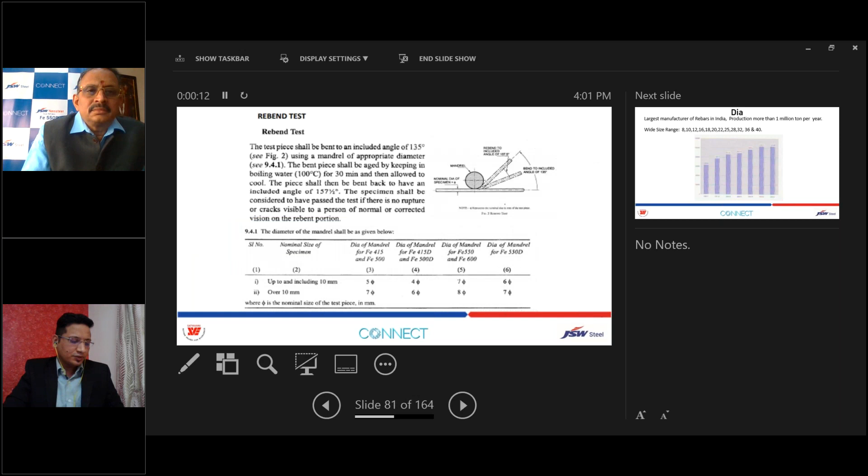Good afternoon, and thank you Omkar for the good words about my introduction. It's my privilege today to share some of the knowledge and thoughts about this very good topic that you have selected for the audience, particularly the engineers and practicing engineers.

It has been in my mind - there are many questions for me also regarding the use of higher grade rebars which we have been using and trying to find solutions for. So today I'm going to share whatever solutions we've found for the use of higher grade rebars, what issues we are facing, and how in the future this material is going to go higher and higher in grades. Welcome, all participants. I'm very happy to share this presentation today and I hope it will be useful for you all.

So higher grade rebar, the material of the future, is the topic of today's discussion. My presentation overview is: introduction briefly on the topic, and masonry, concrete, steel, and RCC - how it has transformed structural systems.

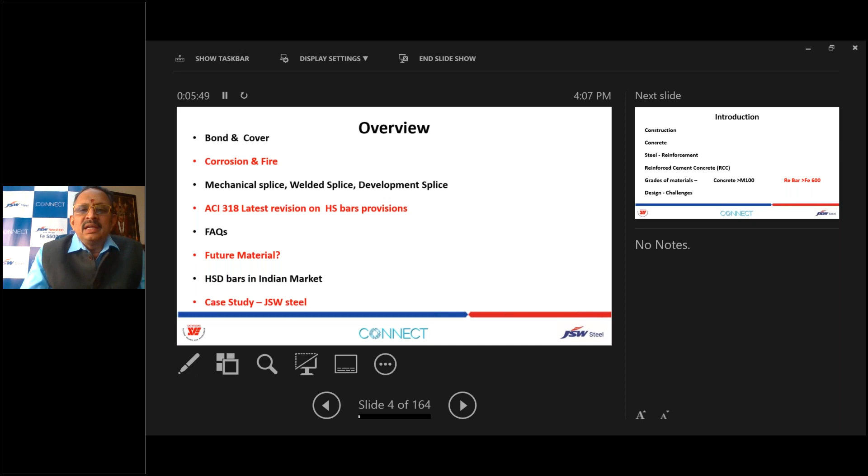So with this overview, let us get into the topic of the day, higher grade. We are all connected with construction, either in planning, design, detailing, engineering, construction, or maintenance, and we are all aware how important it is.

Full screen. One minute please, I was told you're not getting full screen now. Are you getting it now? Yes, we are getting it. Okay, thank you. Sorry for the inconvenience. Good that you told me in the beginning so the viewers and attendees are not inconvenienced.

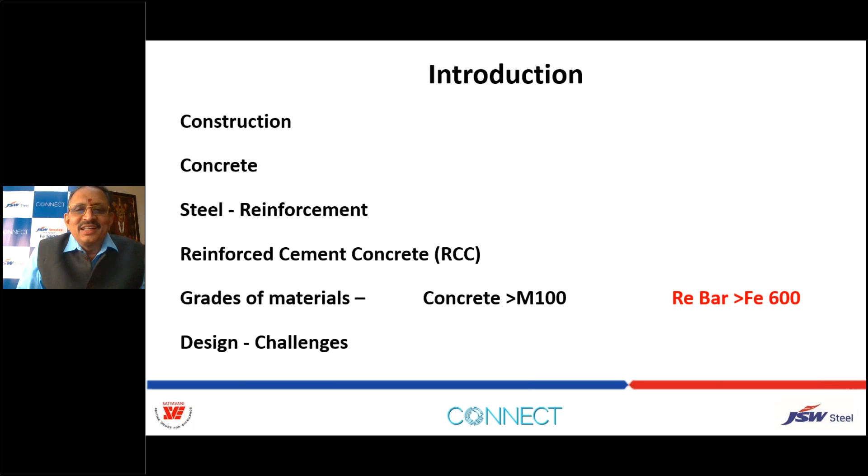So in construction, the role of reinforced concrete and steel reinforcement plays a very great role. In this pandemic and lockdown period, we are seeing a lot of lectures on concrete, since everybody thinks concrete is a complex material that we need to understand more about. I have given many lectures on concrete, precast and all, and on steel for pre-engineered buildings, but reinforcement as a material as a specialized talk, this is the first time I'm talking about it. To my surprise, I found there is a lot to cover, so please stay alert and aligned with me to get this information I'll be sharing today.

Reinforced cement concrete is the most versatile material for structural elements, spread uniformly worldwide with the widest applications. As we all know, concrete itself is the second most used material after water, and concrete cannot go alone - it needs reinforcement.

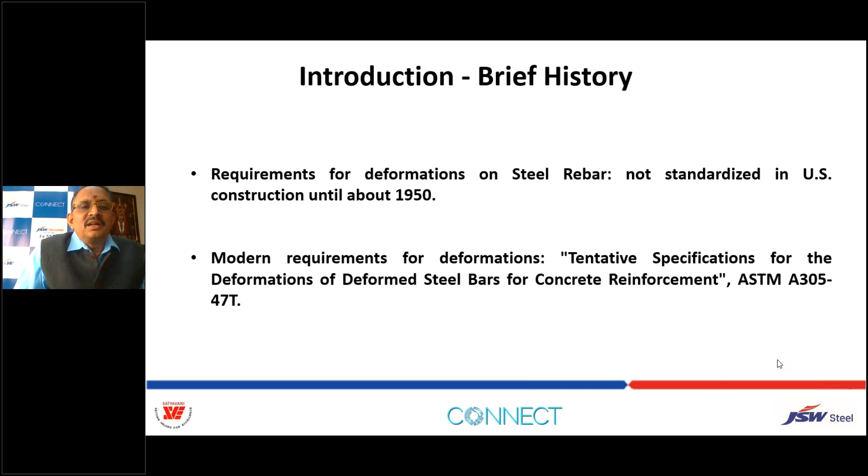So the requirement of deformations on steel rebar - reinforcement bars in masonry construction was first used about 600 years back.

So we can all feel confident that the concept of reinforcement per se is time tested. During the 18th century, rebar was used to form the carcass of the Leaning Tower of Nevyansk in Russia. The cast iron used for the rebar was of high quality, and there is no corrosion on the bars till date - that means more than 200 years.

Europe and North America developed proper reinforced concrete in the 1850s, and we know the longest standing reinforced cement concrete high-rise building is about 113 years old now. So around mid-19th century, rebars were used in producing modern reinforced concrete.

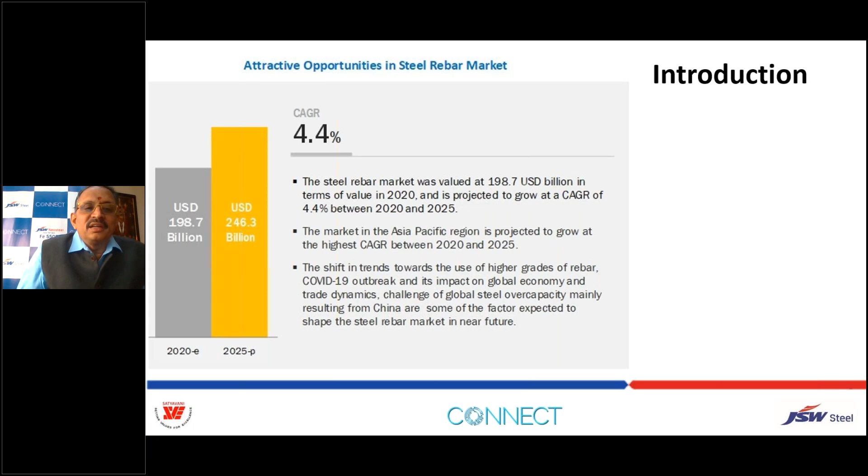Now we can see the business of reinforcement is about $250 billion, and it's going to reach that by 2025. Currently it is about $200 billion. Out of this 246 billion, the Asia Pacific consumes the maximum reinforcement, doing the maximum business. We are all in the Asian region and Indian subcontinent, one of the fastest growing countries.

It is very important for all of us to be clear about these grades of this material, the quality of this material, and using this material.

As we all know, structures all started with masonry, which we see in structures about 2,000 to 5,000 years old. Then came concrete, then reinforced masonry, and then steel structures. Today reinforced concrete has become very common, being used everywhere in rural, urban, developed areas and underdeveloped countries also.

And next is the pre-stress, which has gone beyond reinforcement and composite materials. Now today we are talking about high-grade materials, upgrading this reinforced cement concrete. Otherwise, we were only used to using M15 grade concrete and Fe415 for almost 2-3 decades. Now is the time we have to upgrade our materials, and also upgrade our design data with these higher grade materials. So let us just refresh our thoughts on this reinforcing material.

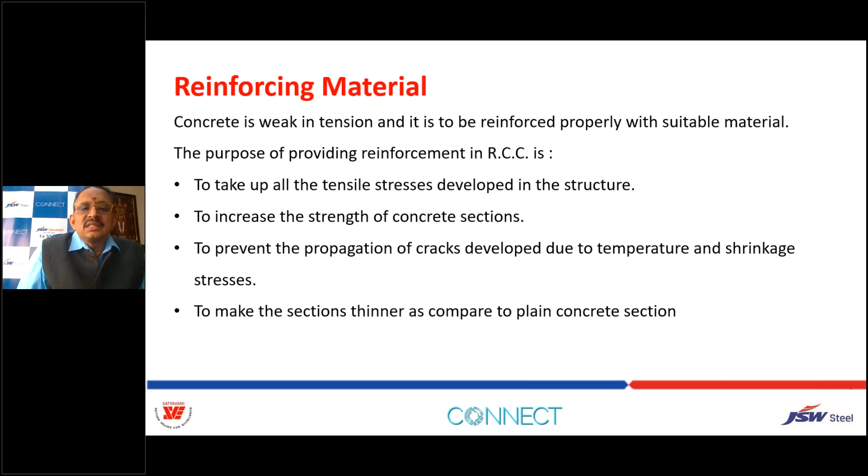As we all know, concrete is weak in tension and is to be reinforced properly with suitable material. The purpose of providing reinforcement is to take up all the tensile stresses and increase the strength of concrete sections, and prevent the propagation of cracks developed due to temperature and shrinkage. So we provide reinforcement not only for tensile stress, but also to restrict crack propagation due to temperature and shrinkage stresses, and to make sections thinner as compared to plain concrete sections. So these are all the reasons for reinforcing, and the criteria is it should be having perfect bond with the concrete.

That is the most important thing, as we all know. The steel reinforcement should develop the bond. Otherwise, because these two are different materials, we can't utilize the tensile capacity of the steel without this bond capacity. So that is one of the most important criteria.

And next is it should be of high tensile strength, because we are trying to compensate the weakness of concrete in tension. And cost should be reasonable, because many people ask me, students particularly, why not aluminum, why not other metals which also have higher tensile capacity, even carbon fiber. So reasonable cost is the basis - steel is an optimum material satisfying all these requirements.

The next most important point is coefficient of thermal expansion, which is reasonably in tune with that of concrete, because when there is temperature change, if these two materials have different coefficients, then it loses its marriage or bond connection. So it should be workable.

Next most important thing, we should be able to cut it, bend it, and join it, because we should be able to fabricate. Concrete has become so popular only because of its flexibility. Same way rebar with steel also has become popular only because of its ease in cutting, bending, and joining. We are trying to further improve this as we move forward. We'll discuss all those points.

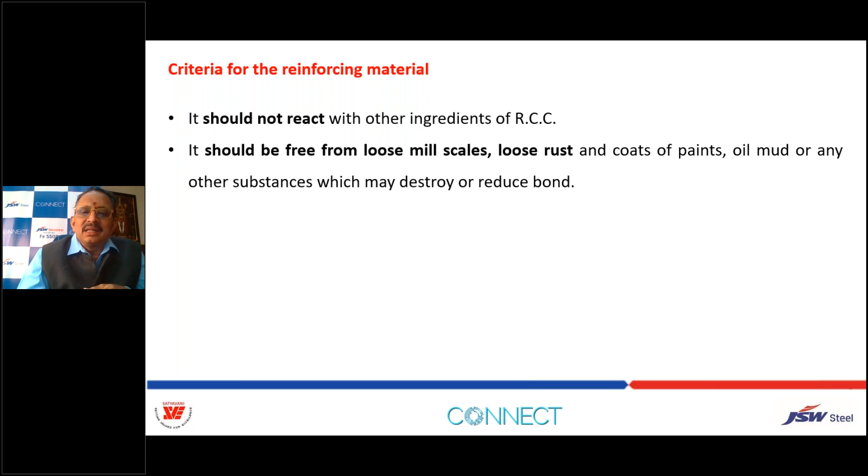So that's how we have got this steel reinforcement or rebar - tor steel or TMT and HSD bars now today. Tor Kari was a brand which I used in 1990, which had come up with 550 grade even those days. I can't forget it, because I want to share that experience with you. Many people - at the time I completed my design and drawing with Fe 415, then my client came up with this Tor Kari, saying that it is having very high strength, almost 30% more strength compared to what I had already designed.

So please modify the drawing. It was such a huge work, and you know, structural engineers are paid very paltry fee. And I thought that I must do it efficiently. So what I did is I applied a 1.3 factor and reduced the steel reinforcement. In the process, I ignored certain detailing criteria and minimum percentage of steel criteria and issued the drawing.

And also almost construction had started. So what I'm trying to say is, please don't use such methods. We have to inform the client - when you are saving the cost, you should compensate us for the extra work also. So use of higher grade materials, if we have to do, convert the drawings, convert the designs, we have to spend again right from the scratch.

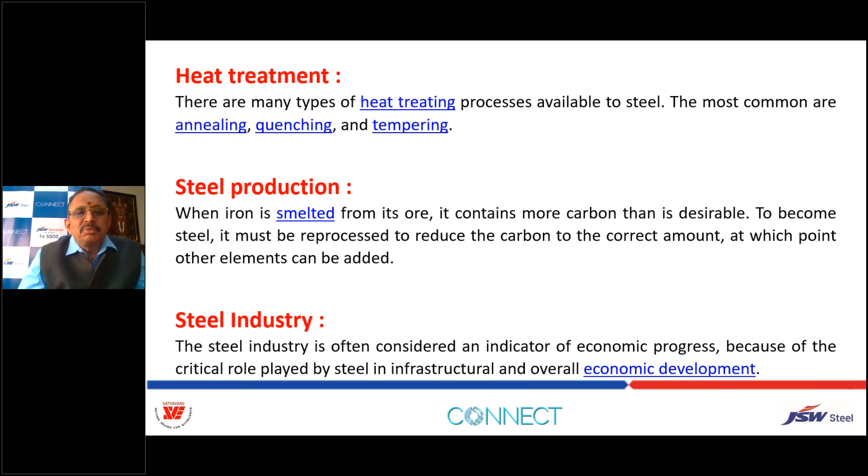So regarding the suitability of steel as reinforcement: steel is very strong in compression, of course with buckling and proper ties, and also has tension capacity. We utilize almost 87% of its strength as per our design, along with shear and torsion capacity.

Concrete develops a very good bond with steel, and steel is ductile. That's very important because it never fails suddenly. Steel gives us time to understand the yielding, and we can save lives if it reaches that point. More elongation of steel before failure helps us.

That's why we insist on the percentage elongation of steel. The steel bars can be cut, lifted, and welded easily with commonly available tools and sand machines. It also has a longer life, if provided corrosion protection, or if we use corrosion-resistant steel.

It's easily available because, over the last 20 years, steel production in India has grown threefold with companies like Jindal, Tata, and others, which was otherwise mainly produced by the public sector. India has grown from 30 million tons of production capacity in the new millennium, around 2000, to 90 million tons.

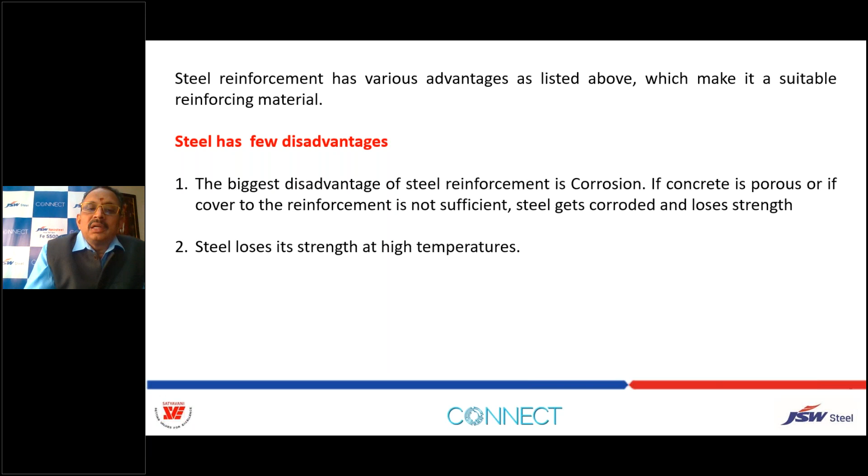Regarding rebar types, we have come across mild steel. The property of 7850 kg per cubic meter is what we typically take for density, but it can range between 7750 to 8050, or 8.05 ton per cubic meter unit weight. This is the main property.

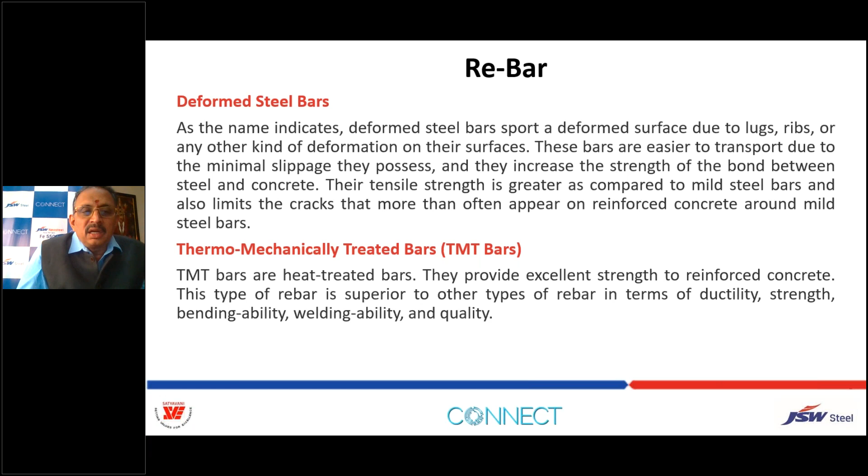We also have deformed steel bars, TMT bars, which are very popular today - thermomechanically treated bars. We also have high strength deformed bars; that's the actual technical term as per the code, and these are the high strength deformed bars that we are using.

The HSD bars have got very good corrosion resistance, as well as high strength and ductility. We'll examine all these properties.

We also use rebars with corrosion protection, such as carbon steel rebar, European rebar, or galvanized rebar, which has a protective coating against corrosion, as well as epoxy coated rebars and stainless steel rebars that are coming up. And finally, the glass fiber reinforced polymer rebars. So these are all the types of rebars.

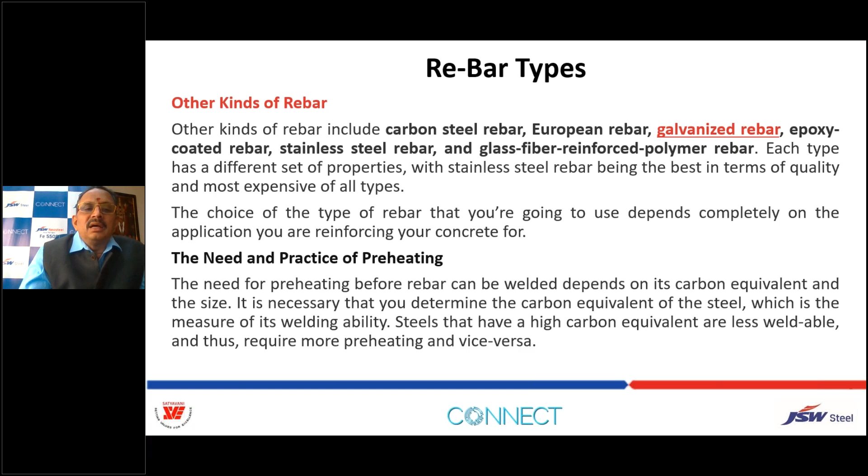Just for academic interest, I'm sharing this, not directly relevant to today, but since we are talking about corrosion, we need to think about this. We also need to discuss the practice of preheating, which is required for weldability, and I'll share more on that as we move forward.

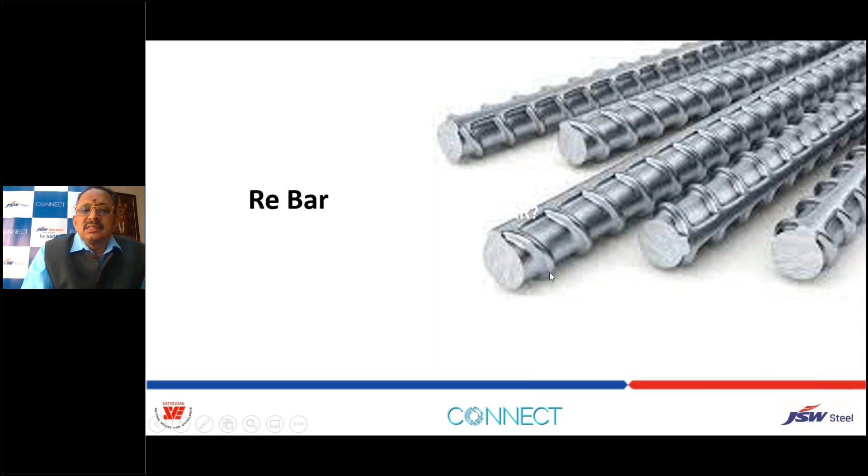Now the types of steel bars. As we all know, HYSD bars used to be twisted with ribs like this, and now we have TMT and Thermex reinforcement bars, which look like this. This is the rebar we normally use. There is a specification for the radius of this junction and the rib size for a proper, adequate bond, which we'll be discussing. So these are all the rebar types.

We don't use rebar in isolation, we all know. There will always be a joint for the rebar, or we use it as a mesh, or we use it in a bent condition.

So what are the issues? Why should we talk about higher grade at all? What are the issues in the current rebar we are using, whether it's FE 415 or FE 500? Let us just refresh again.

As per SP 34, we do the detailing - how to place the reinforcement, what is the spacing, what is the diameter, what is the minimum and maximum spacing, and what is the minimum and maximum steel percentage. All these provisions are covered in IS 456, along with detailing requirements like development length, position of the splice, and bent bars, all defined in SP 34. I'm not going into detail, just refreshing on these ideas.

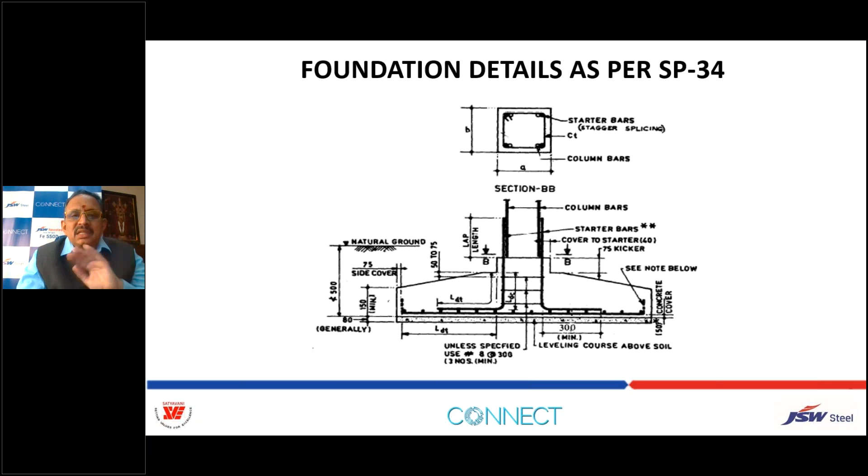Then we have ductile detailing as per IS 13920 for earthquake resistance, and we use mechanical couplers also in the higher diameter bars. Sometimes we are forced to go for welding, and there are precautions we have to take for that.

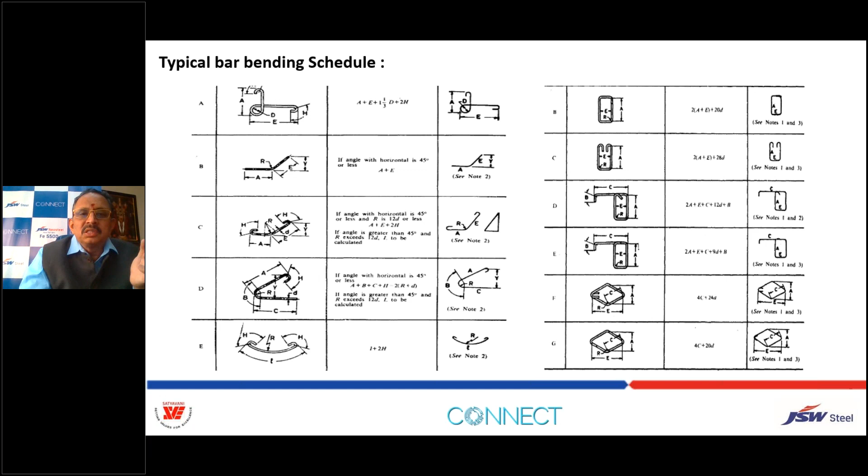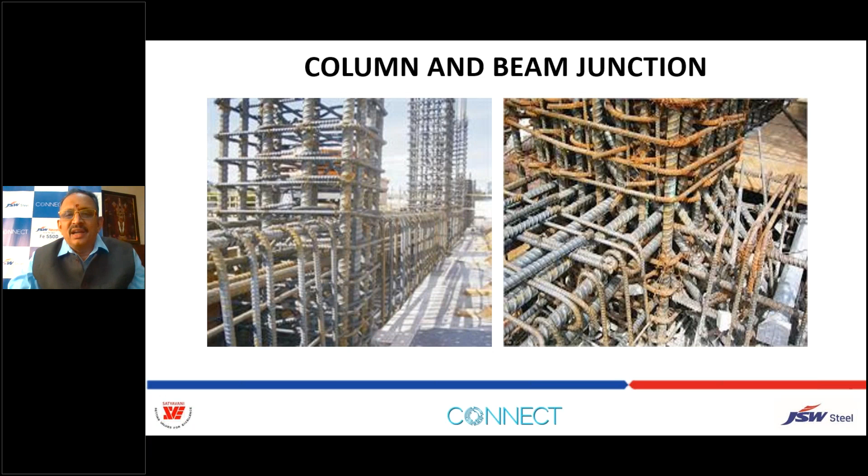So how do you solve this? The only solution is higher grade material. These are project pictures showing reinforcement congestion - here too you can see how steel makes it hard for concrete to go down. You might use flow mix and 12mm aggregate only, but it's still a challenge to concrete and vibrate or compact in this kind of situation.

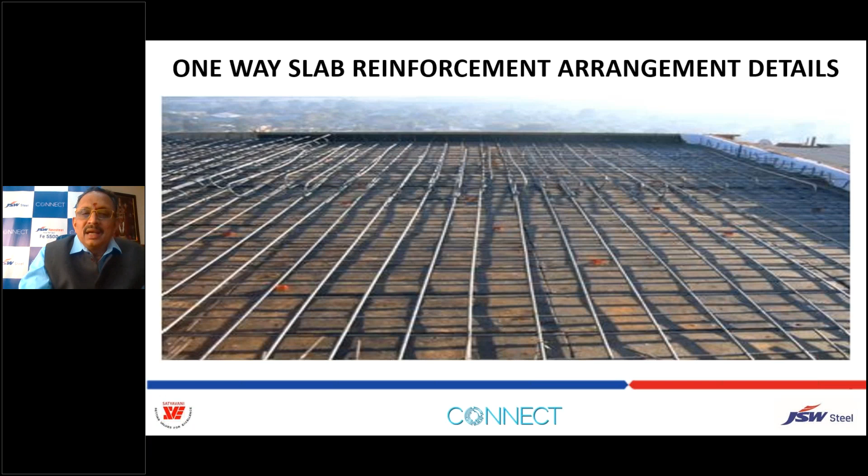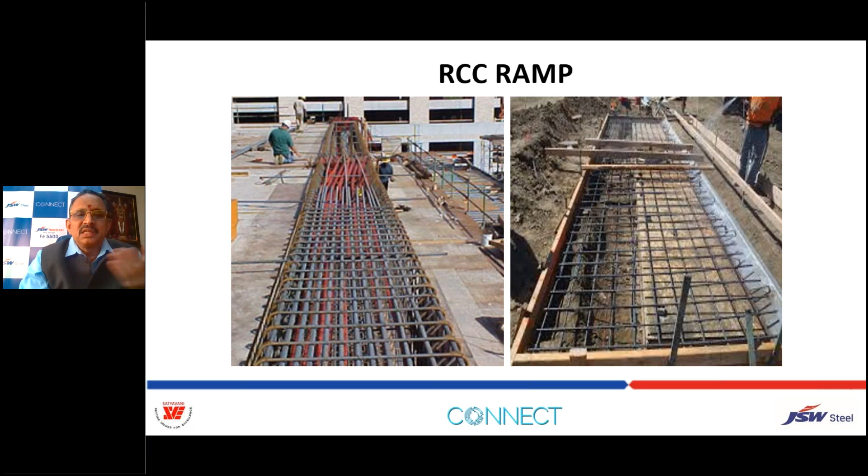And types of rebars, we all know mild steel almost is gone out of usage, except in structural steel we use it for tie bars and all that. But otherwise, HYSD, now it is 2008 IS 1786, and deformed bars have become the order of the day. We are using high strength deformed bars. Now we have this FE 500, and now it's going to FE 550 also. And TMT bars and corrosion resistant CRS steel.

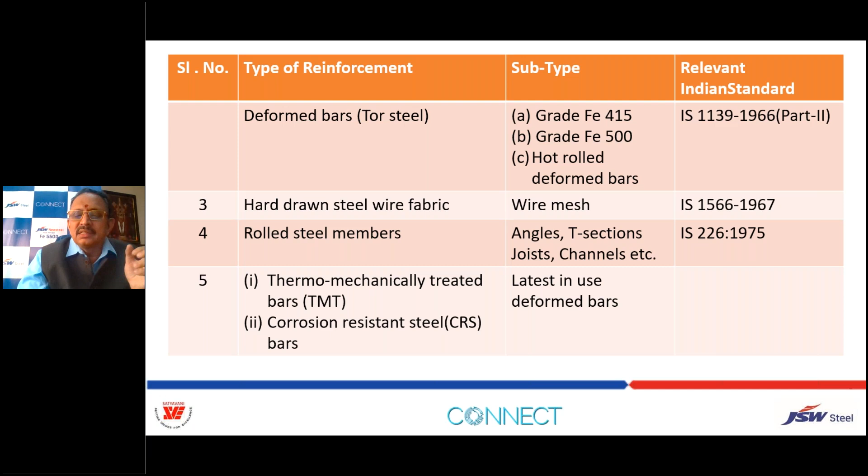That is low carbon, and this kind of material has become very common. Mild steel reinforcement - I won't go into detail - Fe 250, which we used to use for stirrups 30 years back. Almost from the last 20 years, we stopped using this mild steel. But mild steel is good for bending, and probably we can use it where spacing governs. I clarified in FAQs whether we can use a combination of HYSD and mild steel - no, you cannot use two different grades of steel as per the code within the same main reinforcement. So that we have to keep in mind while designing.

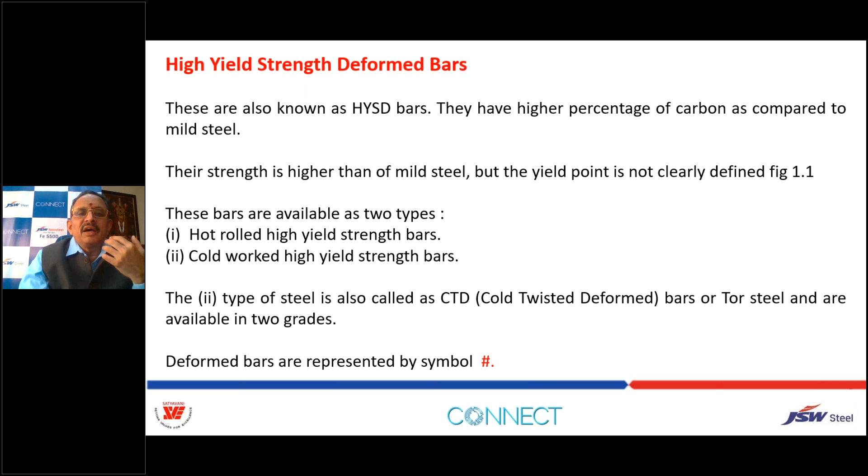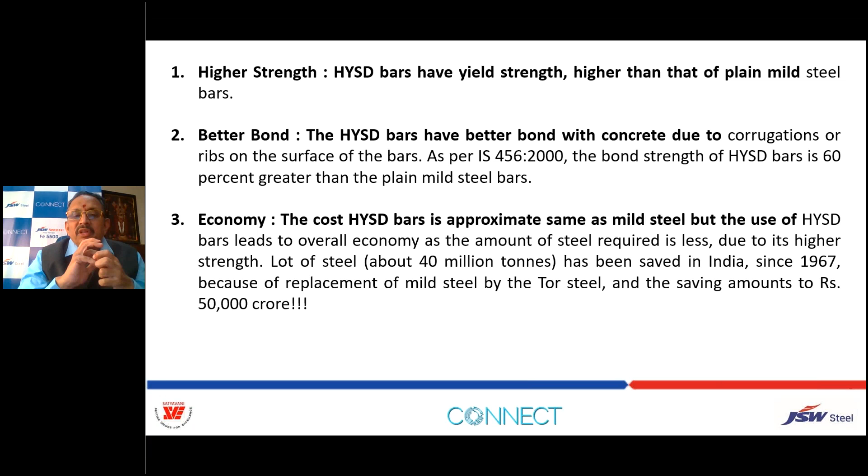HYSD bars itself had a lot of advantage over mild steel, because in mild steel we had the major problems of bond, the development length. So with the HYSD bars, with the rib on the surface, we could improve the bond capacity by almost 60%. And now TMT bars have further improved, because in HYSD we had the problem of surface cracks and all. So now with this TMT method, we are able to get much better quality with high yield strength, better weldability, and ductility - that's most important - and superior corrosion resistance.

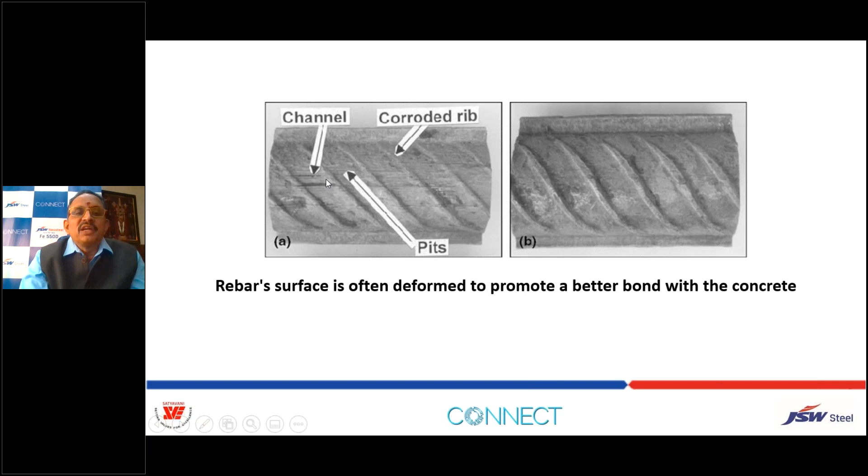So these are all the important things. We can see the rebar surface deformed to allow corrosion limited to the rib, and the channels are there, and these ribs also will help us for bond resistance. And these pits for corrosion - we have to be very careful about measuring the corrosion resistance, and it will give better bond. These deformed bars have these ASTM standards.

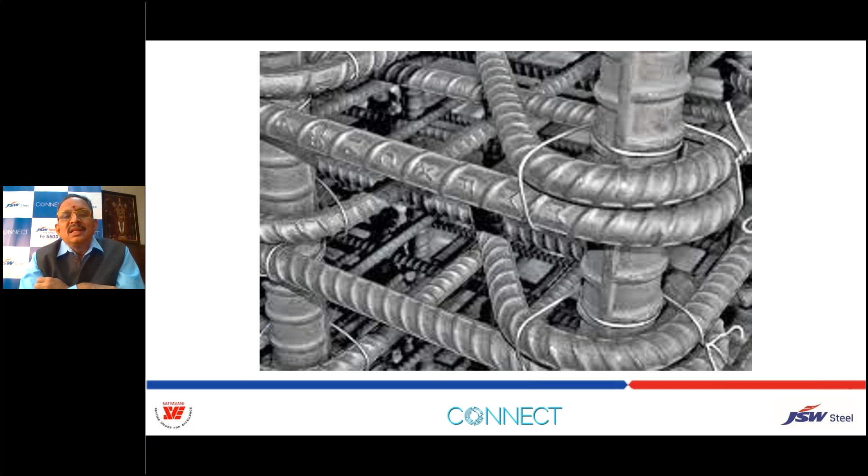The latest is ASTM A706 and 615. So higher grade reinforcement we can use. And the physical characteristics of these rebars - we must check for thermal expansion coefficient for concrete and steel, which has to be the same. And bendability - this is a very important aspect, because the anchorage we can get only with the bendability.

So rebar has ribs that bind it mechanically to the concrete. The ribs develop this mechanical bond resistance - it's not only by the chemical bond stress, and it can still be pulled out of concrete under high stresses. So to prevent such failure, there should be embedded enough concrete and anchorage provided to the reinforcement. Common rebar is made of unfinished tempered steel, making it susceptible to rusting.

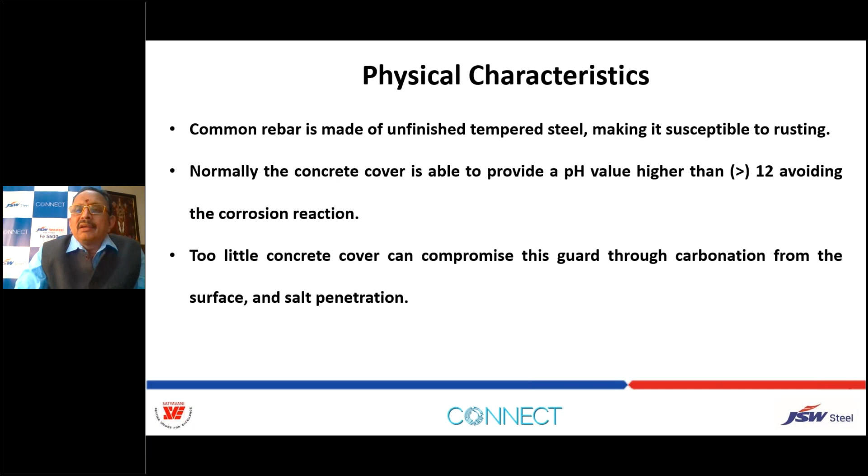That's why concrete cover with a pH value normally 11, and it can be greater than 12 also, avoids the corrosion reaction. So too little concrete cover can compromise this guard through carbonation. Adequate cover as per IS 456 provisions for durability criteria has to be maintained. Too much concrete cover is also bad, because crack widths will increase with cover beyond 50mm, so we have to strictly follow the provisions of IS 456, the durability criteria.

It's not just enough to design with adequate cover and leave it. We should also check the performance of this concrete with tests on carbonation and sulfate resistance. So that is all to protect the steel reinforcement.

So this is the brand embossing. We should check the brand of the steel with the brand embossing, as per the code. And corrosion resistance bars have 0.18% carbon content as compared to 0.2% of HYSD.

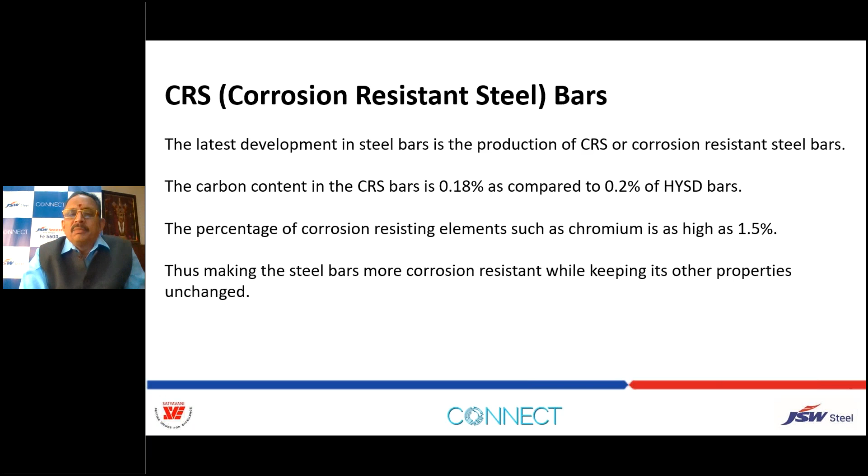And elements chromium should also be 1.5%. This is the CRS steel. And then we have this proof stress of 0.2%, and yield stress at 0.2% of proof stress.

Characteristic strength, we all know concrete characteristic strength. Likewise, we should have the steel characteristic strength also. The tests as per the code we have to conduct for maintaining the quality. Normally I have not come across major problems in steel characteristic strength unless it is a very bad manufacturer. All reputed manufacturers give us good strength. In my experience, I haven't come across bad steel so far. Only the brand we have to ensure.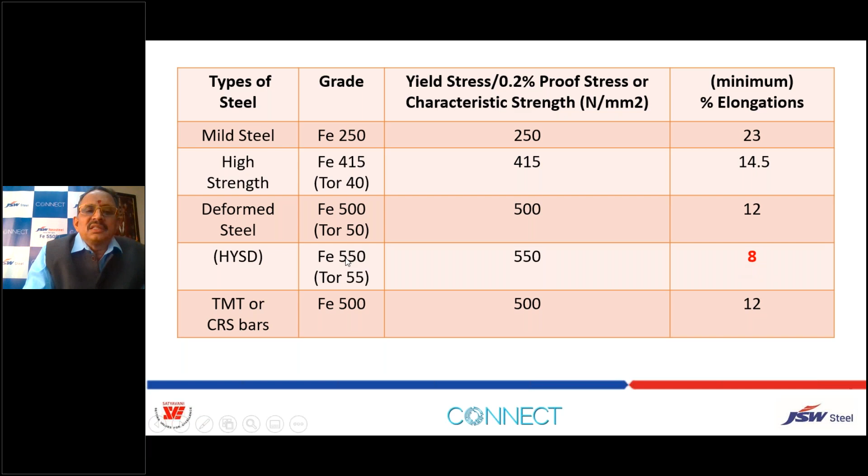And then we have this comparison of various reinforcement. The only thing is this HYSD bars of 550, as per code, the elongation will be allowed. But if you are designing for earthquake zones, seismic zone 2 or 3, we must insist on a minimum 14 percentage elongation. That's why you come across 550D and all that in the market.

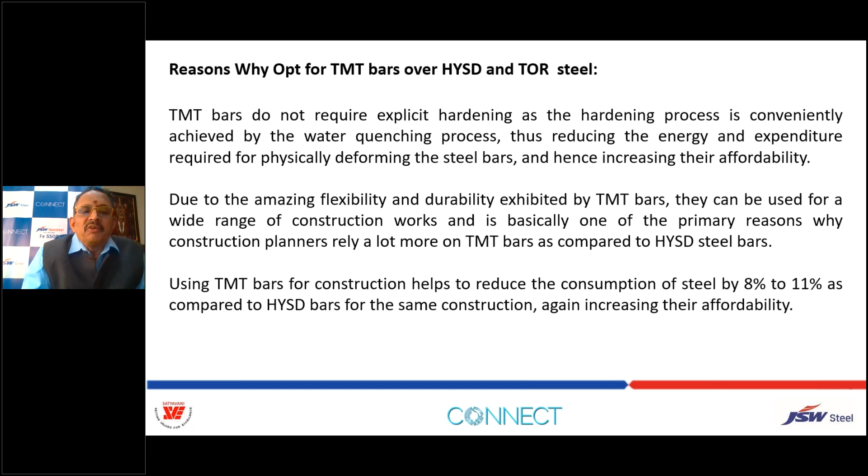This TMT bars over HYSD bars, I'm just comparing. We have surface defects in HYSD, which are eliminated by using TMT bars. A lot of flexibility and durability is found in TMT as compared to HYSD. And reduced consumption of steel, reduced by 8 to 10, 11%, because of its higher strength. TMT means I'm talking about 500, FE 500, as against 415 which was there. And now with HYSD bars, we are talking about 550 and 550D.

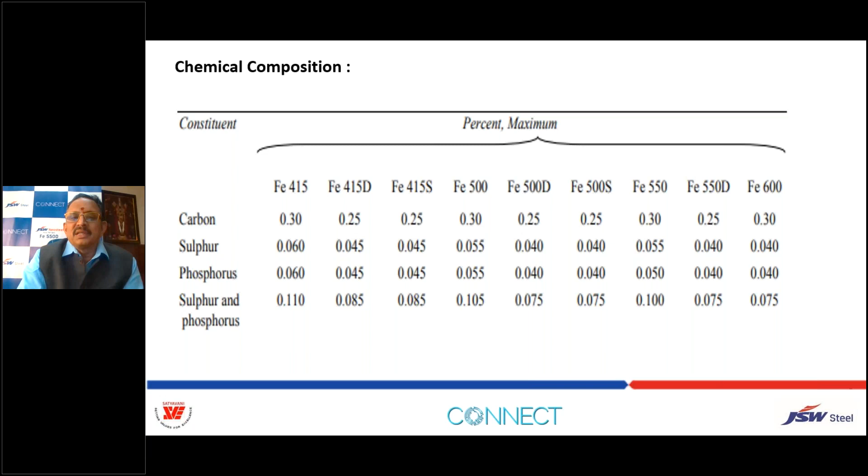So this is the chemical composition. We are all aware if it is just 550, it is 0.3 carbon content. And if it is 550D, carbon content is reduced to improve the ductility. The sulfur and phosphorus are also reduced to increase fire resistance and overall ductility. These are all the guidance as per the IS provisions.

Now let us talk about high strength deformed bars, ranging beyond 500. Now we are talking about 550. In India we also have the possibility of procuring 600 or 650, customized. So we can procure this kind of high strength if the particular project requires it.

And there are provisions, as I said, in ACI. So the provisions required for high strength rebars in the codal provisions, amendments are required for IS 456. As I said, it requires improvements in the bond and bendability of these high strength bars. We must check the bond capacity and the bendability. Cover provisions - do we require any modification in the cover? And what about the corrosion of these high strength bars?

Because when we utilize such high strength, the diameter to be maintained as per the design is very important, and with corrosion, we all know the effective diameter is going to reduce. Ductility provisions are also important - even if we use high strength bars, ductility is very important for seismic resistance, percentage elongation, and fire resistance. The splice, the development length, the regular bond splice or mechanical splice with mechanical couplers and welding.

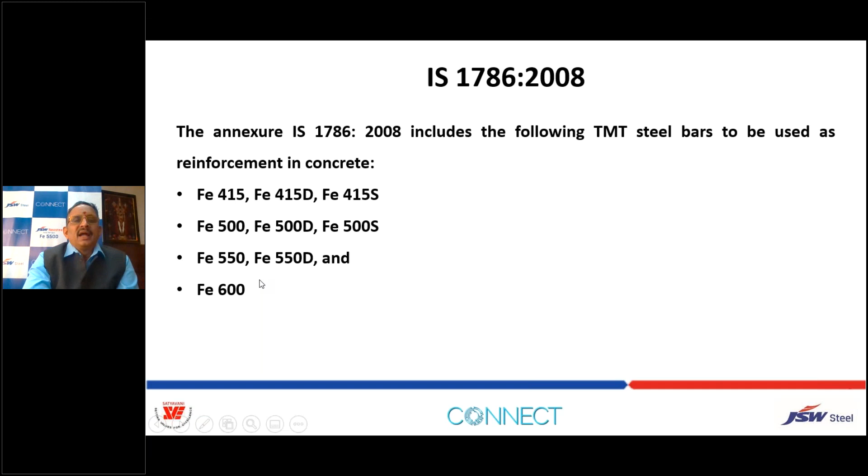And we have to do crack width calculations when using this higher grade reinforcement because of the higher stresses. Though we are increasing the strength of the steel, the concrete we might be using M25 or M20, or highest M40, M50 also. So it's always good to check the crack width as per our tensile stress in the rebars.

And design aids - I have come across, in fact, when I asked my team what is the disadvantage of using 550, they said we don't have this modification factor for the deflection check in IS 456. So I always say please don't use this modification factor based on L/D ratio alone. Calculate the elastic deflection and the long-term deflection, and then use that percentage for the modification factor, and try to give adequate provision for this modification factor instead of just bothering about it directly.

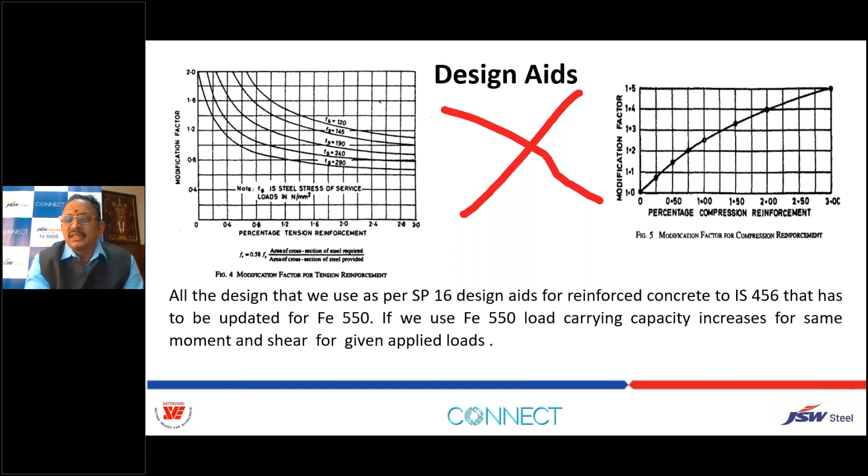And then stress strain curve for these high yield strength bars and HYSD bars, IS 456 has given up to 500. The modification factor will have an effect on the stresses as well as the deflection criteria. So we all have to take care while using the high strength bars.

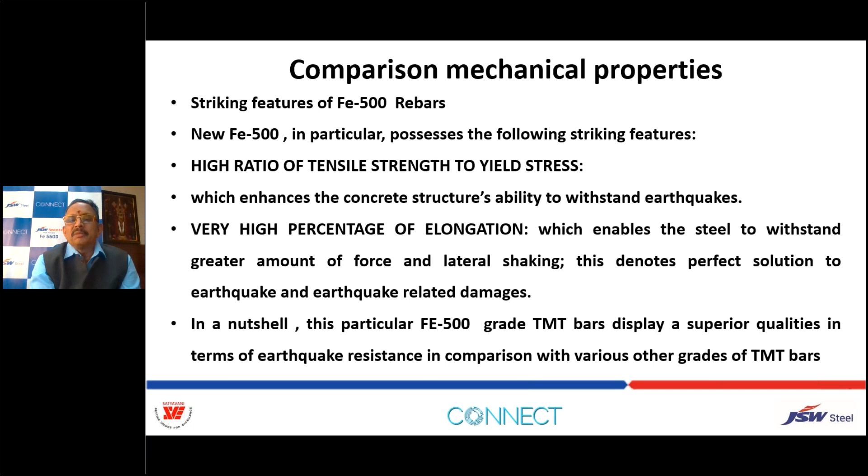And regarding mechanical properties, there is a high ratio of tensile strength to yield stress and very high percentage of elongation that is required for ductility, and TMT bars display superior quality for all these requirements.

And bend test, we have to do the bend test because once we give the drawings and approve the grade of steel, it should not so happen it starts cracking while doing the bending for the fabrication. So it's very important to do the sampling, bending and rebend test as per the codal provisions. We have to do all these bends and verify the performance of these bars.

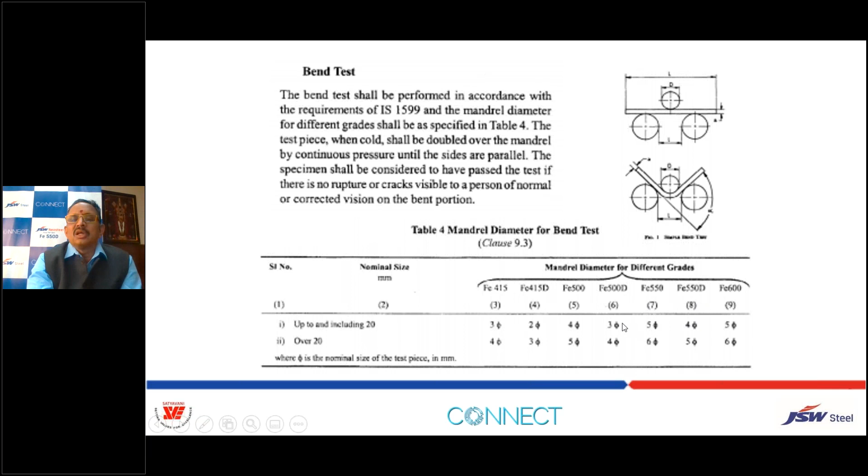These are all the sample bend tests. Including 20 dia bars, we have this bend 4 dia for 550D and 5 dia for 600, and 5 dia for 550. So for ductility, we must insist on 4 dia and 3 dia for 500D.

And a rebend test - in fact, at the site we fabricate the reinforcement, assemble it, and at the site we require some change and we do the rebending. So there is a gap between the bending and rebending. In the test also, it is recommended to give the time lapse between the bend and rebend when we are testing, so that it represents the realistic site condition. And if you are satisfied with the quality of the reinforcement rebar, we can use it.

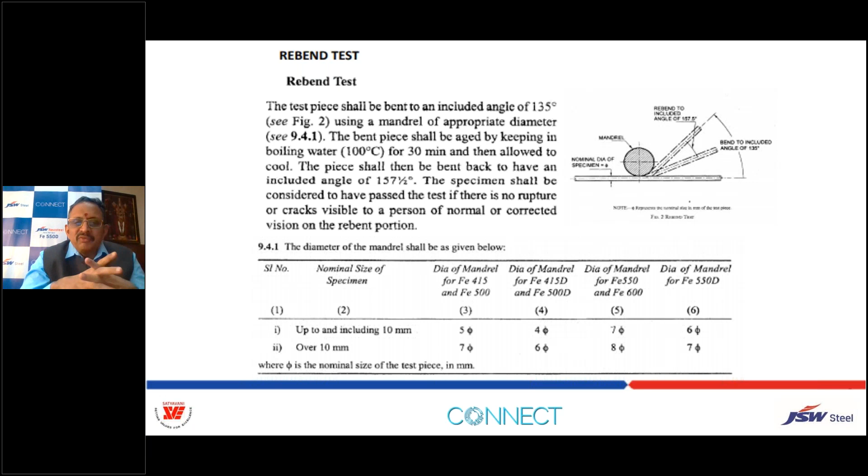Ductility is important in the TMT process itself, and low sulfur and phosphorus content improves the ductility also and fire resistance also. And bend radii must not be below the prescribed minimum sizes.

So this is a very important point for bending of the rebar. That means when we detail, we should take care of this. And incorrect bending can severely affect the performance of steel.

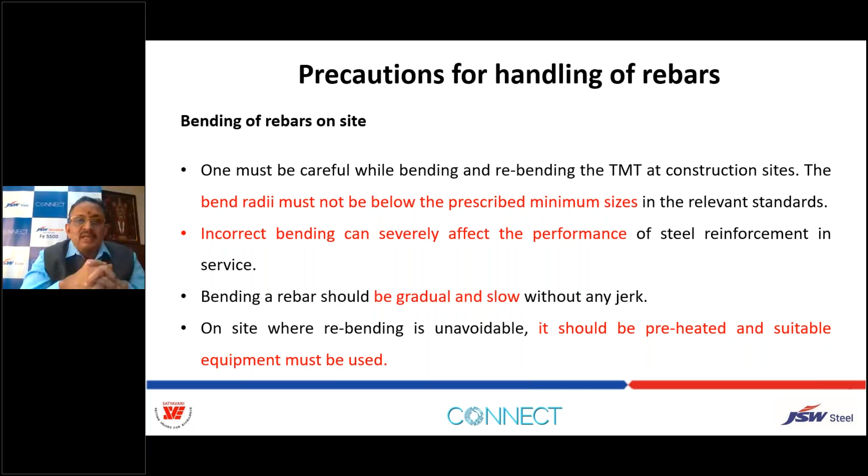And it should be gradual and slow - that means while bending, there is a rate of bending. So we must train the bar benders to follow that gradual bend, because otherwise the steel material will be wasted - they'll break and they will complain about the quality of the steel. It should be preheated wherever required, and suitable equipment should be used for this bending.

And next is the most important point - we have to differentiate between rusting, corrosion, and pitting. These three are different characters. We must understand rusting means it is like atmospheric.

But corrosion goes deep into this, and pitting - sometimes the depth of the pitting is more than the diameter of the bar. It's very important we must observe this pitting corrosion, which occurs randomly and localized on the metal surface, so the depth of penetration is much greater. We have to be very careful about this pitting corrosion.

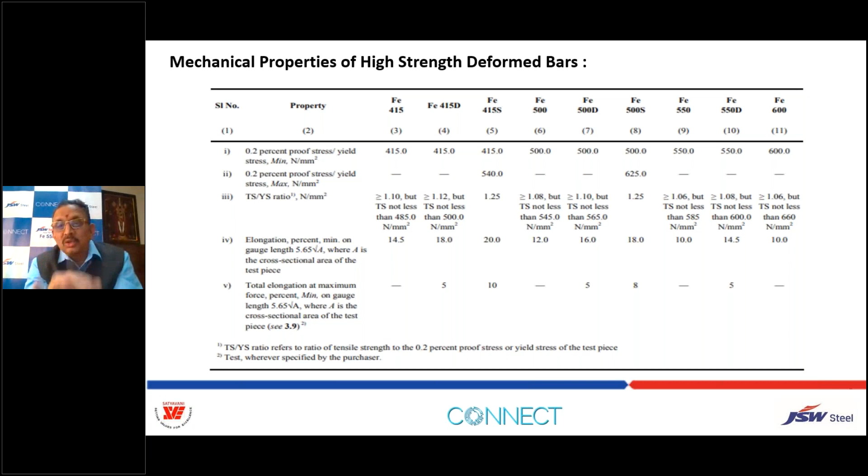And the code provisions - what IS 456 and ACI define for mechanical properties, they're all defined there. I'm just showing these for us to refer to these tables and important provisions. It's not my objective to explain all this, but please refer to this for yield strength requirements.

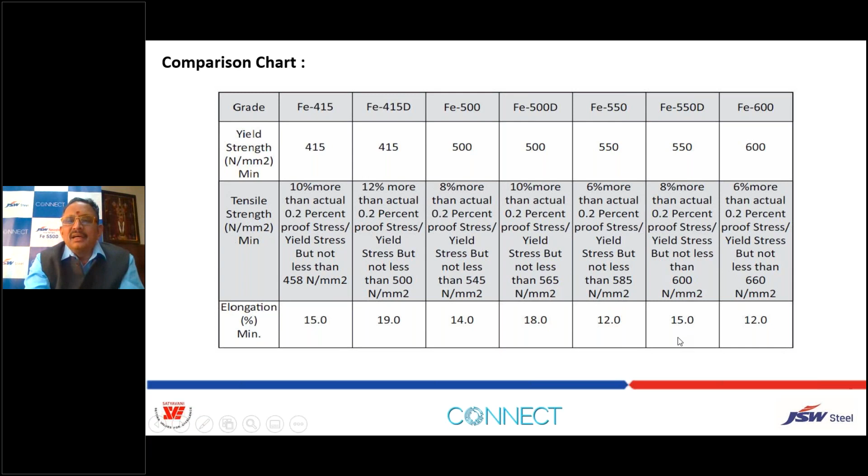And then percentage elongation requirements - you can see for 550 it is 12 percent elongation requirement, and 550D it is 15, and 600 it is 12, and 600D it will be 15. So let us check the percentage elongation after testing, and maximum mandrel diameter for the bend test, which I have shown before also. Even for HSD bars, we have to maintain this.

And these are the characteristic strength and minimum ultimate UTS and composition of the steel as per the codal provisions. This also I have shared before, mainly the carbon content, sulfur and phosphorus, and combination of these two. We must test the steel not only for strength and percentage elongation, we should also test for these contents or the manufacturer's report.

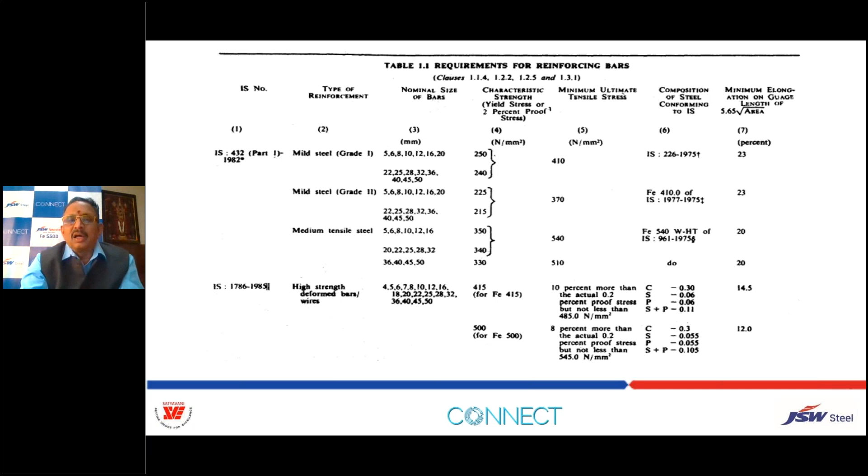And next is the development lengths that are given. You can see for the bars for MS bars, Fe 250 and Fe 415 are given, and Fe 500 is given, but 550 it's not given.

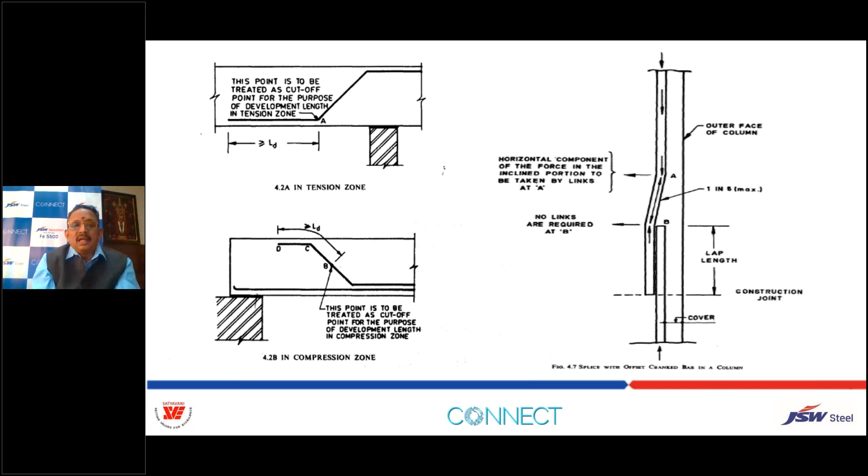So we have to calculate using the formula, and while calculating there are certain provisions that are missing in the present code. That's what I'm going to explain with the ACI. So we all know about development lengths, anchorage zones, lap splice and transition zones. We have to keep all of this in mind.

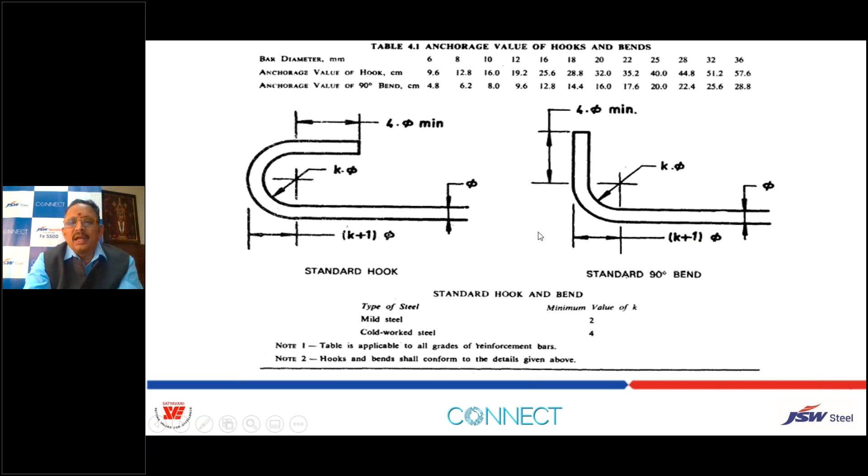For MS bars, we used to have the standard hook, and with HYSD, HSD bars and TMT, we have end anchorage, hook and bend. These are the different hooks and bends required. This is very important for maintaining the development length along with the anchorage. In fact, some provisions state you should not depend more than 50% on the bond; 50% you depend on the anchorage only. So it's very good to eliminate slippages, particularly in fatigue zones.

Next is the minimum radius of bends that are given. They have to be maintained for all grades of bars, and it is given only up to grade 500, and now we require it to be modified beyond this.

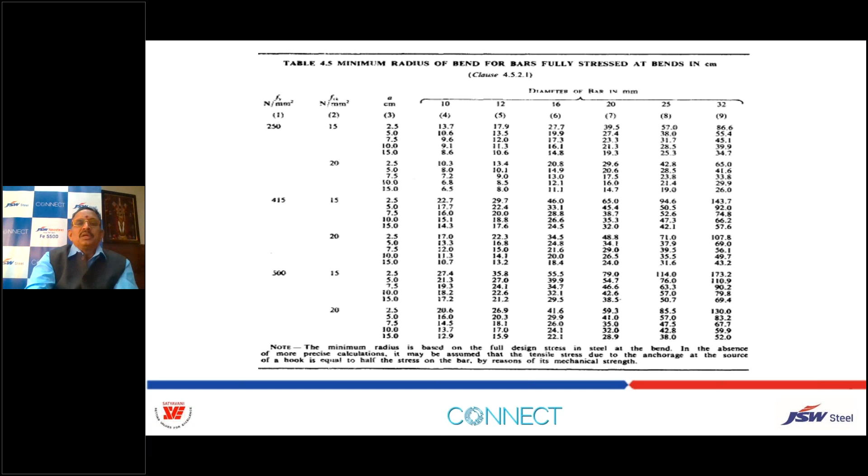That's why I said let us look at the ACI 318-2019. This is the latest code which has incorporated high strength rebars, so use of grade 80, that is beyond 600 MPa. Grade 80 is based on PSI, 80,000 PSI, and it is equivalent to 600 plus. Reinforcing steel grade 60 is 60,000 PSI, commonly used in North America at present, and now ACI talks up to 100,000 PSI, which can be up to grade 700.

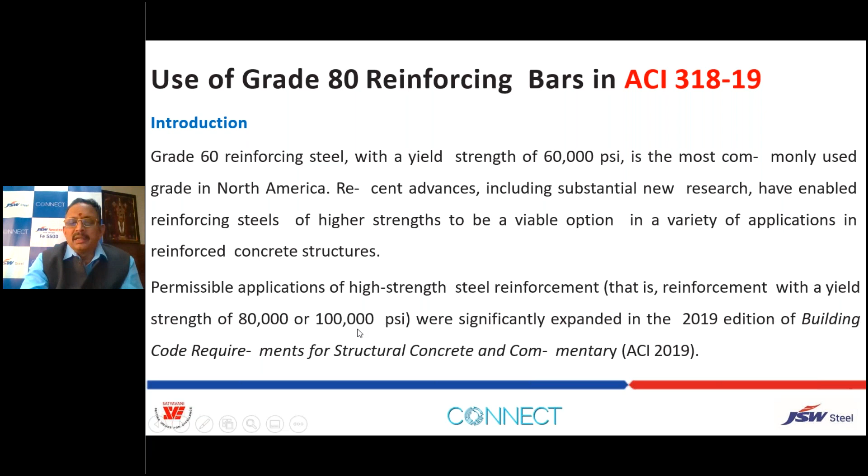So these are the codal provisions, ACI provisions, which we can adopt using ASTM testing methods, and then we can use the bend tests also for these higher grades. We can conduct these bend tests as per these provisions.

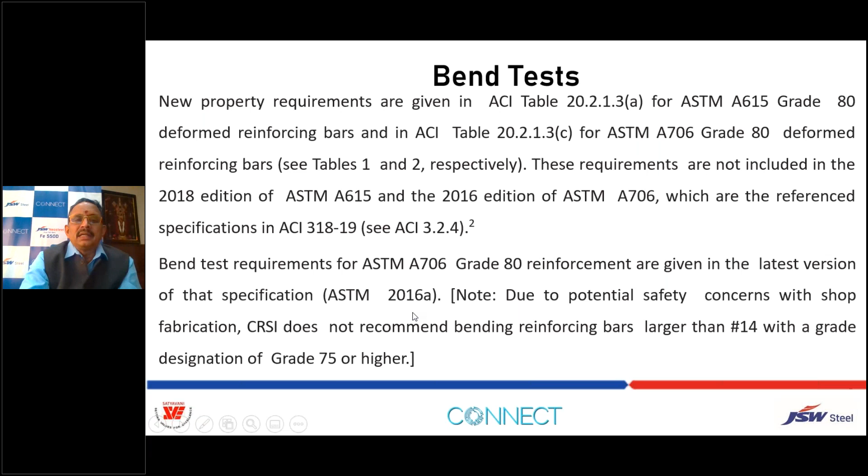This will help us because IS 456 or IS 1786 go up to 600, but IS 456 has a limitation up to 500. So until it is revised, we can take support of this ACI, using minimum percentage elongation and minimum ratio of actual tensile strength to actual yield strength; for 100,000 PSI we can use 1.1.

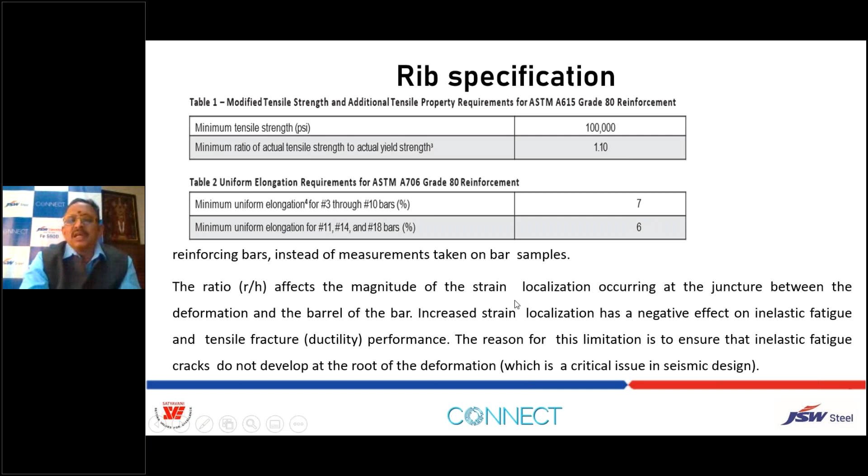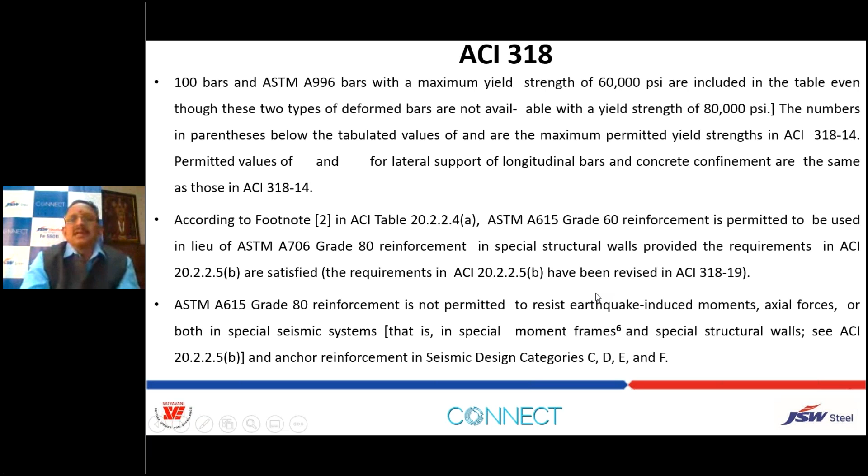So we can use grade 80 reinforcement bars with proper calculations, modification factors and reduction factors. You can see they are all provided with high strength bars, so please refer to this ACI.

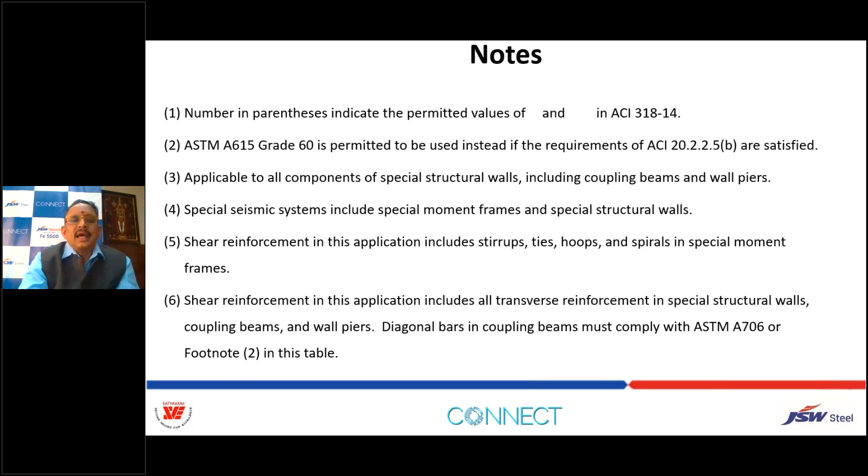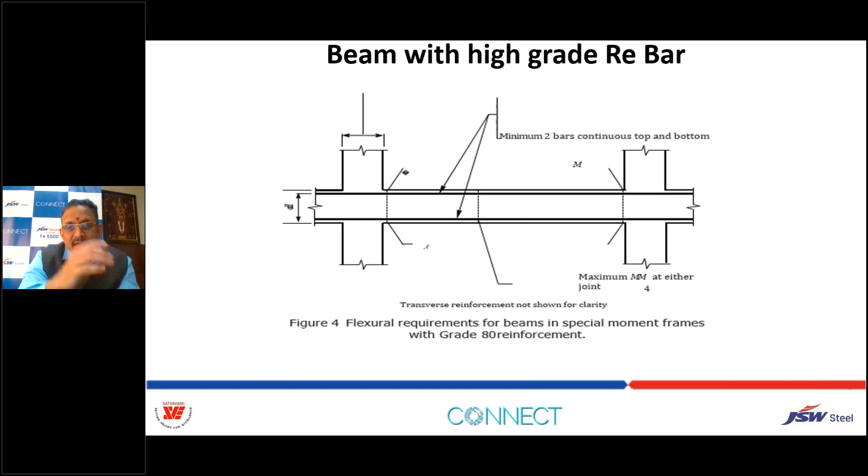Please refer to this, ACI has also given detailing provisions for beams and ties, splitting reinforcement. Particularly when we use high strength bars, the bursting is also very high, because the concrete cover we are not increasing. Cover is mainly provided for other purposes, so you cannot depend on the cover, only on the ties.

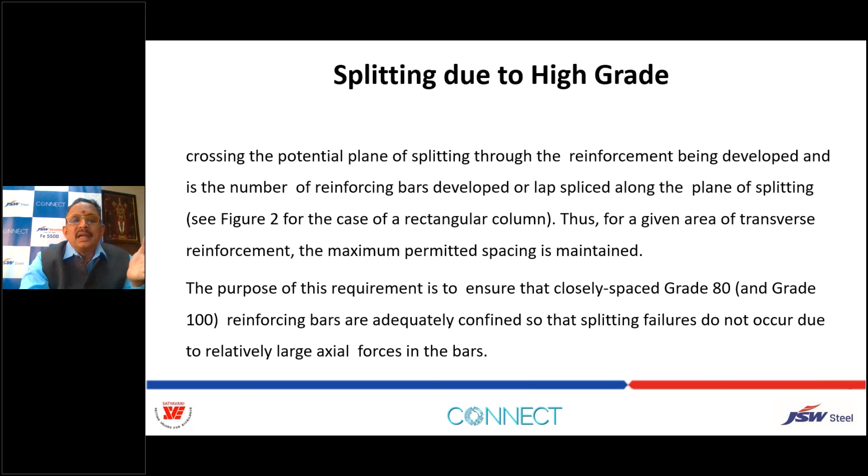So the ties detailing provisions we have to refer to, particularly for columns. The column detailing, when it comes to splitting due to high grade bars, you have to follow the ties provisions and spacing of these ties, depending on the diameter of the bar, and splice these using mechanical anchors, all this.

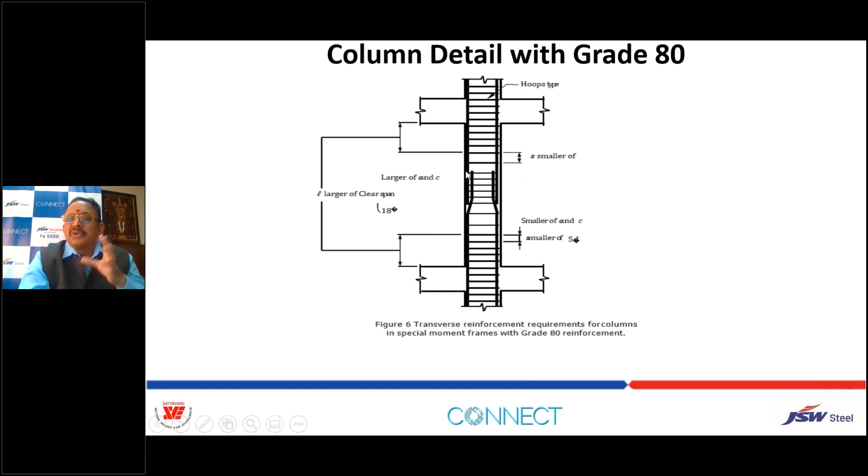So this is the position of the splice, and we have to follow IS 13920 anyway for the shear calculation and ductility provisions. ACI also gives provisions for high strength bars. When we use the high strength bar, we have to utilize this.

The strength reduction factors, this is the tension control limit. We know concrete has limitation on tension, whereas we are increasing the tensile capacity of the bar. So whenever we have this tension control limit, we have to apply the strength reduction factor for this longitudinal tension reinforcement at nominal strength, and splice for higher strength in joints, and limits on concrete compressive strength in special structural walls, that is shear walls.

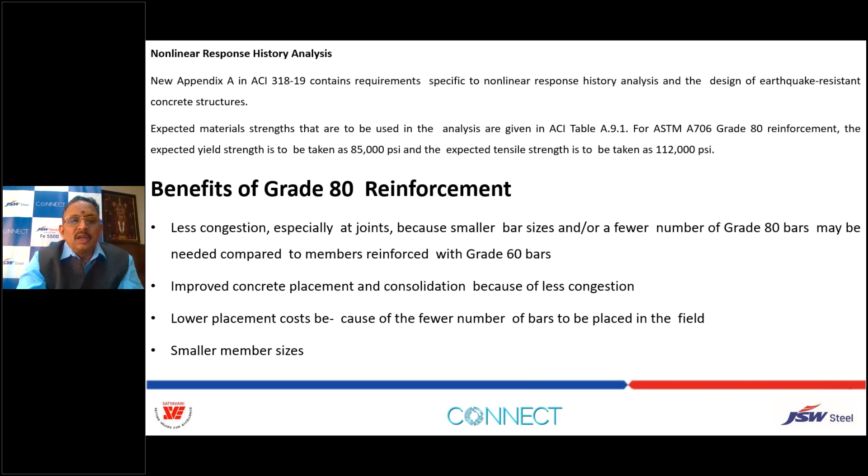There are many benefits, like improved concrete placement and consolidation because of less congestion, higher usable space because we can reduce the sizes of members, and lower placement costs because of fewer bars and smaller member sizes. Longitudinal bars combining grade 80 reinforcement and high strength concrete has the greatest impact.

In fact, we did this even 15 years back when we had a limitation on column size, because the grid was frozen by the client for facilitating parking in the basement. So we had to restrict the column size, and there we had to increase the grade of concrete and grade of steel. Strength reduction factor variations, you can refer to all this.

So finally, I'm coming to frequently asked questions. Can rebars be of different grades together? Rebar of primary stress has to be of the same grade, meaning the main reinforcement has to maintain the same grade. So if you are using 550, better use 550 throughout.

While ties and stirrups can be of lower grade, you can use ties or stirrups of different grade if you want to optimize. Can we use splice for development length? Yes, but please refer to ACI code and recalculate the development length using the reduction factors. Can we weld rebars? Yes, but the welding methods, which I'll explain, have to be adopted. Can mechanical couplers be used? Yes, we have mechanical couplers for usage up to HSD 600 even.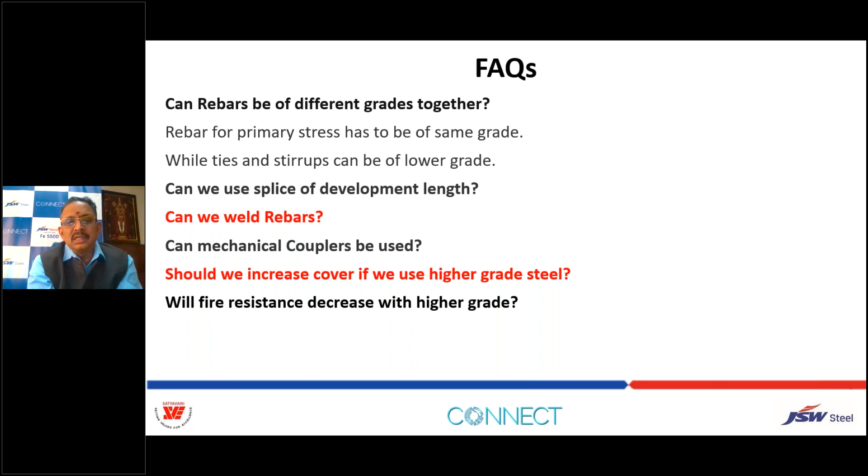Should we increase the cover if we use higher grade steel? As I explained, cover is not dependent on the grade of steel. Cover is mainly for exposure conditions and durability criteria, so maintain the cover as per durability criteria. Will fire resistance decrease with higher grade? No. Fire resistance is governed by the composition, chemical properties of the rebar, so check the phosphorus and sulfur content in the rebar.

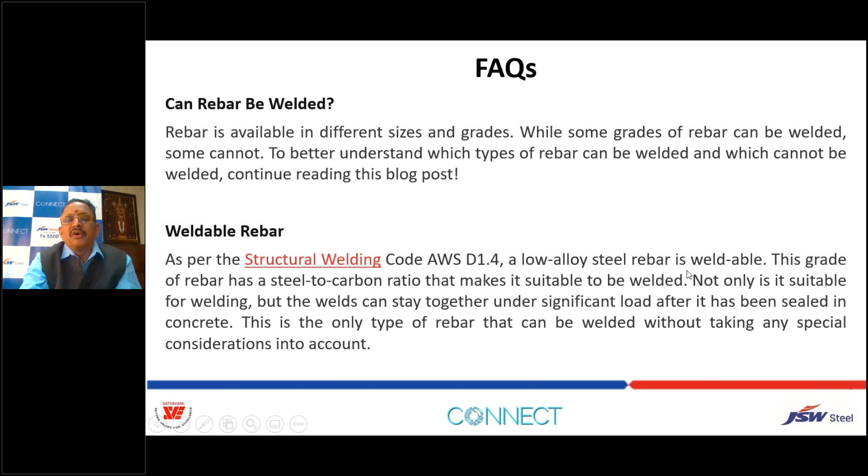Can rebar be welded? As I explained, it is available, and we have to use the structural welding code AWS D1.4. Low alloy steel bar is weldable, and for welding rebar we can use structural connections and design this welding. For non-weldable bars, depending on the chemical composition, we have to decide and should not allow welding.

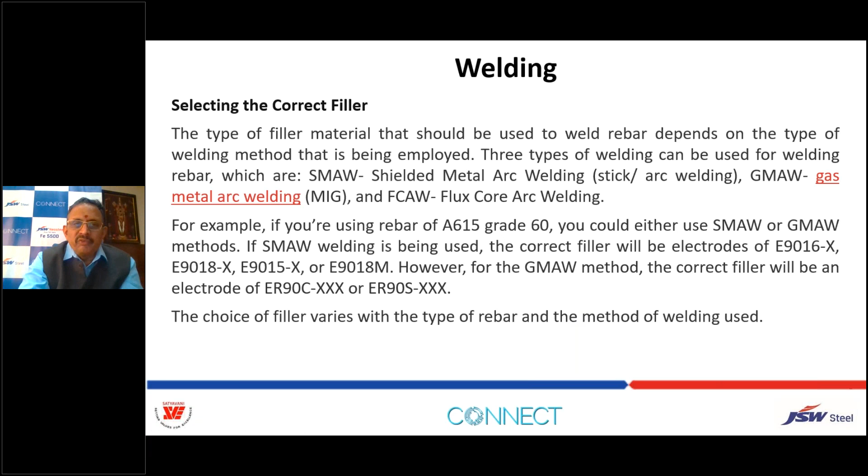Heating is also very important. When we weld, we sometimes have to do preheating, and we have to use special welding methods like shielded metal arc welding or gas metal arc welding. Be very careful, please don't allow welding without referring to the proper technical specification and quality tests on the weld, because our whole bond development or stress transfer depends on this weld. So we have to be very careful while allowing welding. That's why I've given all this information on welding.

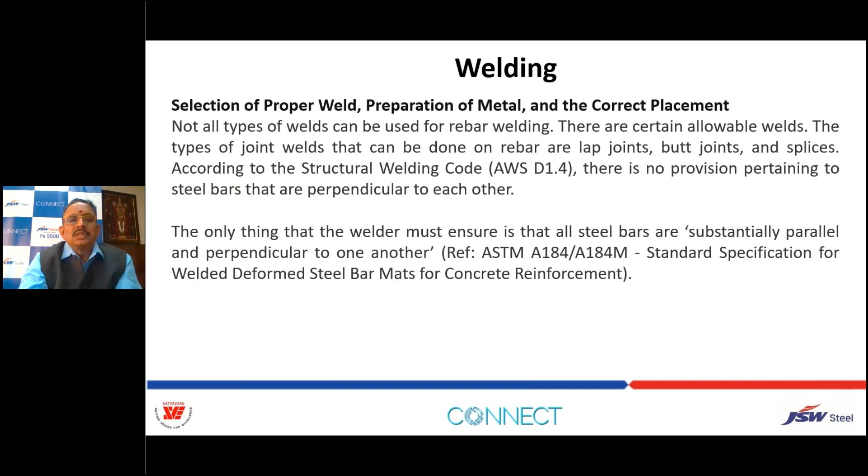So selection of proper weld, preparation of metal, and correct placement of the weld. It is okay to weld the rebar, but you have to refer to proper technical specifications.

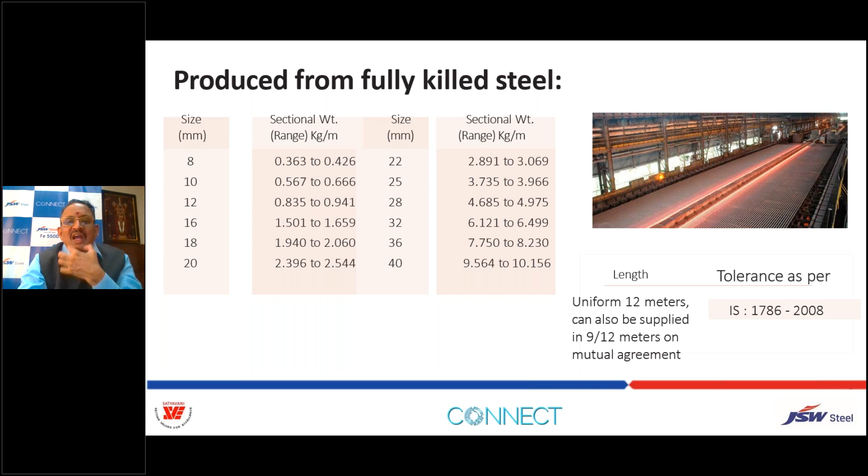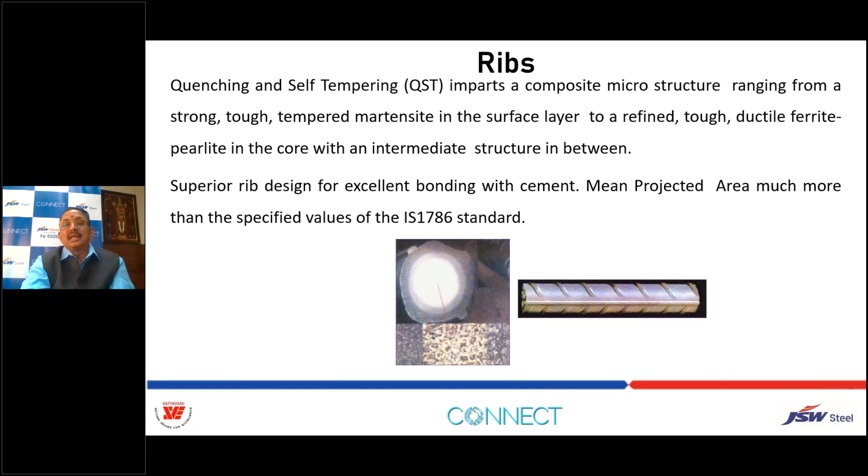HSD bars are all produced in the Indian market, so we don't have to worry, but you have to check the quality as per standards and follow the quality assurance plan for whatever bar you are specifying, 550 or 550D, corrosion resistant or high strength corrosion resistant. Please specify and verify the quality requirements for these bars. Fortunately we have many companies with production capacity beyond 1 million tons per annum, so we can get this steel everywhere in our country at uniform pricing. Aging is another thing, along with superior corrosion resistance of TMT bars, and excellent bendability and workability across the board.

They are available, but you can always get samples of different brands and check the comparative properties.

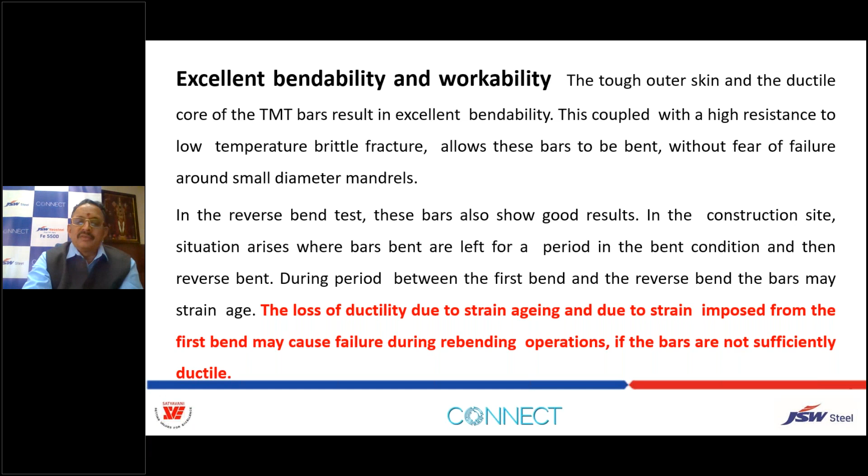The loss of ductility due to strain aging and due to strain imposed from the first bend may cause failure during rebending operations. So we have to conduct bend and rebend tests if they are not sufficiently ductile. This is very important.

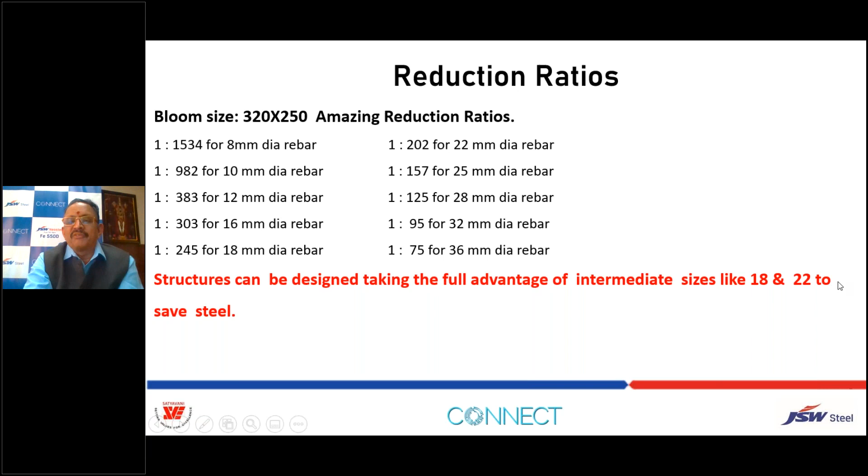TMT bars withstand and have internal soundness and allied properties, and reduction ratios of bloom size should also be very high. You can also ask for intermediate diameters like 18 and 22. We have after 16, 20, and after 20, 25. If you can get these intermediate sizes, it will help you optimize the design.

So all these diameters and weldability — basically the low carbon content and equivalent TMT reinforcement bars ensure excellent weldability, even while using any welding process such as arc welding, flash butt welding, and gas shielded welding. So these are all the welding properties.

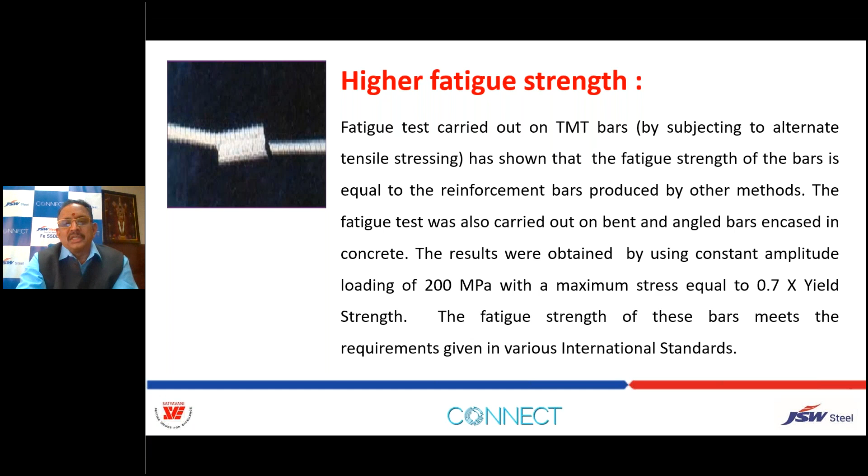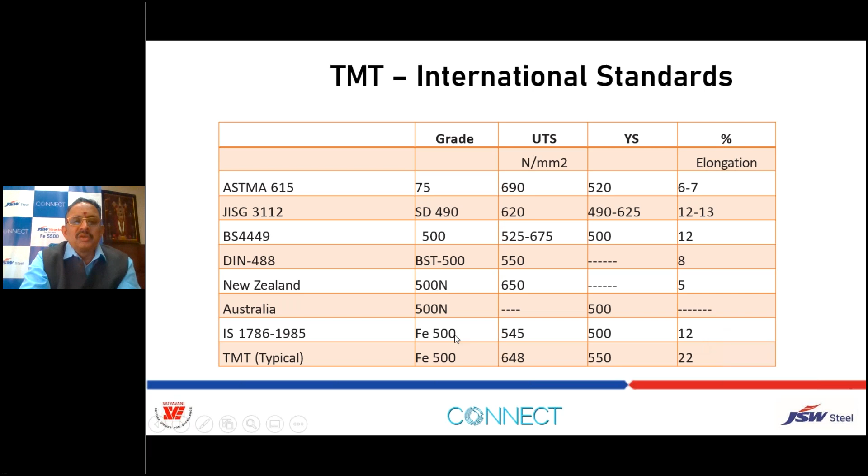If you compare international standards, we have very good quality in India compared to international standards also. Just for comparison, I have given this.

550D design structure is capable of bearing more load than 500D, obviously. And 8% less steel you can use — less steel consumption and faster construction because of the lesser quantity of steel. If you are using 8% less steel, that means in a project where you have...

1,000 tons of steel, that means 80 tons less you will be using. So lesser steel — we have to do this value engineering. More space with higher strength, lower labor cost, and increased earthquake protection because of the ductility and percentage elongation.

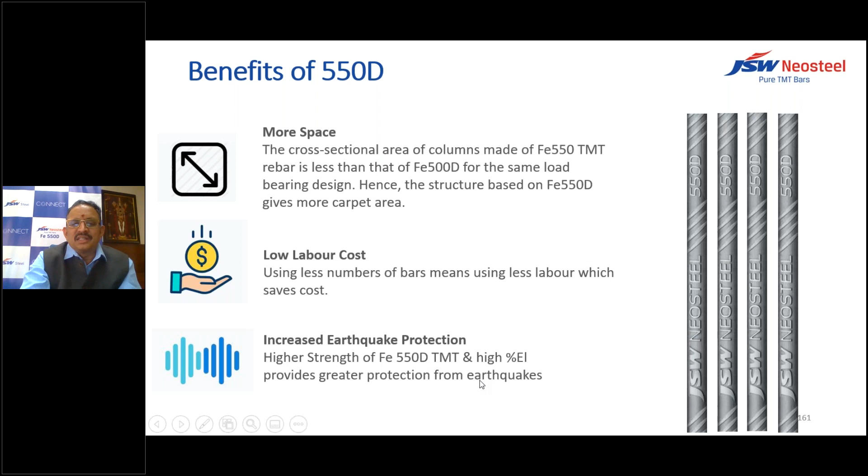So this is what I wanted to share with you, and I thank JSW for giving me this opportunity to share my thoughts and knowledge on this rebar. To tell you, this is the first time I'm talking about only rebar. We have been depending on this rebar design and all, but somehow we give so many lectures and attend so many lectures on concrete, but very few on only rebar. So I especially thank JSW for giving me this opportunity to sum up all the information that we use and deploy for this rebar.

So if you have any questions, somebody can help me pick them up. I have sent the questions on your WhatsApp number — there are lots of questions. You can take selectively 7 or 10 questions and we can answer them. There are a lot of questions still coming in.